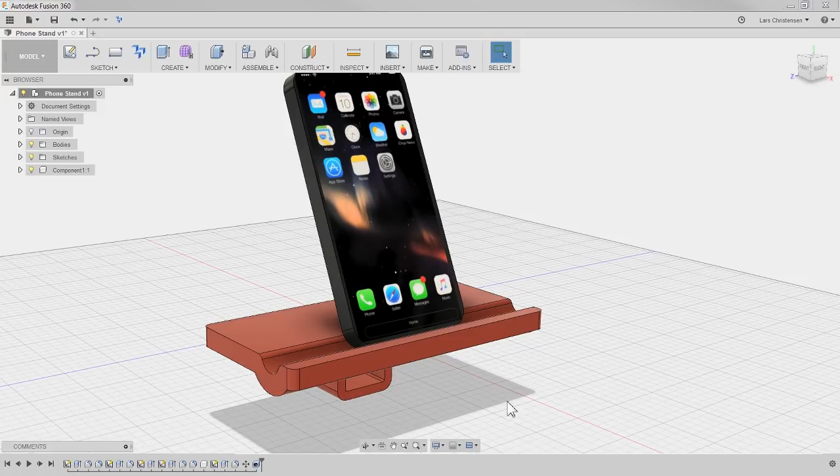So what we're going to do today is I thought it could be fun to model up a phone stand for your cellular phone. If you have a 3D printer this might be more fun. It's kind of like a phone stand - you'll see this is one I found a picture of online, I didn't come up with this. It has this square opening that would actually fit into, if you're doing it on an iPhone, the charging cube. So you can plug this into your outlet, and then slide this holder on top of it, and you now have a place where you can either place your phone up at an angle so you can watch the screen, or I've also seen people who just lay it down on the table and wrap their wire around it. Definitely not the most technical thing out there, but I think it's a really good exercise for modeling up if you're fairly new to Fusion. So that's what we're going to do today.

So enough of that - I can see here Randy asked that he would like to see some live tooling without a Y-axis in Fusion. Okay, that's good, but probably not what we're going to do here on the Facebook live streams - we could definitely chit-chat about it. That would be more for the YouTube style videos, I'd probably have to prep a little bit for that.

One other thing I wanted to address before we get into modeling this up in just two seconds - I got a question regarding the layout of Fusion that I thought was a really good question. You have these menus over here to the left, and then you have stuff down here at the bottom. Why are they split up like that? And if you're coming from other CAD software, I don't blame you for thinking, why are things split up this way?

By the way, hello to James, good to see you man.

So the way I like to look at this is that this left menu is kind of like your heads-up display or dashboard in your car, with information about the parts you're working on. The bottom down here is literally the history of the model being modeled up - that's all that's happening down here, each single step as you go through the modeling process. What happens over here is more like the dashboard on your car with different settings, starting at top telling you if this is just a single component or an assembly. In our case we see what looks like two or three squares stacked or next to each other, which tells us this is what we'd call an assembly, a multi-body. When we see that, we'll be looking for components. This iPhone-looking thing is a component, but there's only one component.

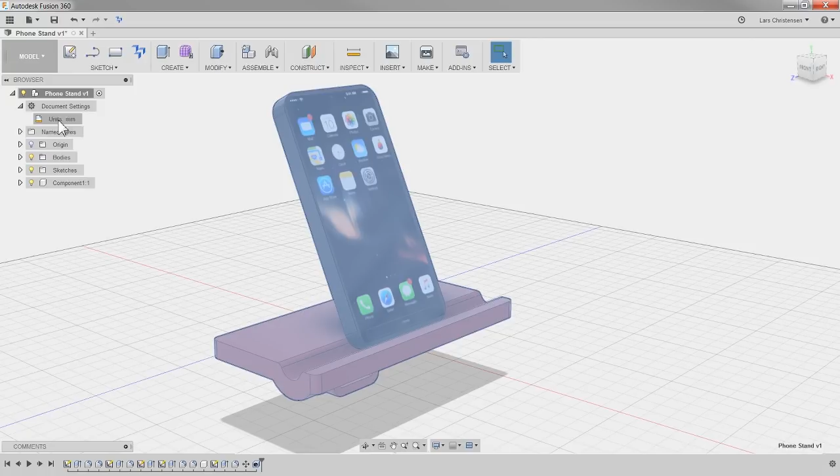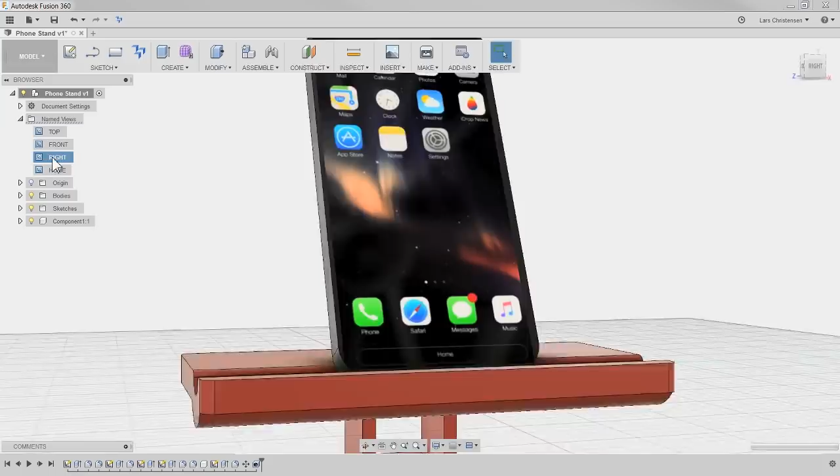So that's kind of like why I'm thinking this, to me, is a little bit like the dashboard on your car. Named views, I actually never really have gone in here in any of my live streams, but you will see that the views here are the ones assembled up here. So if I click top, we go into top view. Front, you can go to front view, and so forth. And home is the same as isometric.

Now, one thing you need to know, if I spin the model around like some obscure angle, you can actually right-click up here and create a new view. And that is now what's called a named view. What's great is if you're working on something and keep going back trying to find a specific view, you can create your named view.

So I can call it, Lars bottom. This is kind of like the bottom of the stand, or it could be the iPhone stand. So now, no matter what view I'm in, just move it around, whatever, and I click on this Lars bottom, and it takes me to that view.

You can right-click on them, and you can either update them or delete them. So that's kind of like how I look at this thing here, as kind of like a display. You've got your sketches, which will show you all the different sketches that were used. Now, all these sketches are also the same sketches you see down here. So if you count them, you should find the same amount of sketches down here as up here. And you can actually turn them on and off to display them by clicking on the little light bulb. Okay, so I hope that was a good explanation on that.

All right, I got my beer here. Cheers, everybody. We got WT, good to see you, thank you for stopping by. Minister from South Africa, awesome. Kurt says the iPhone a potato.

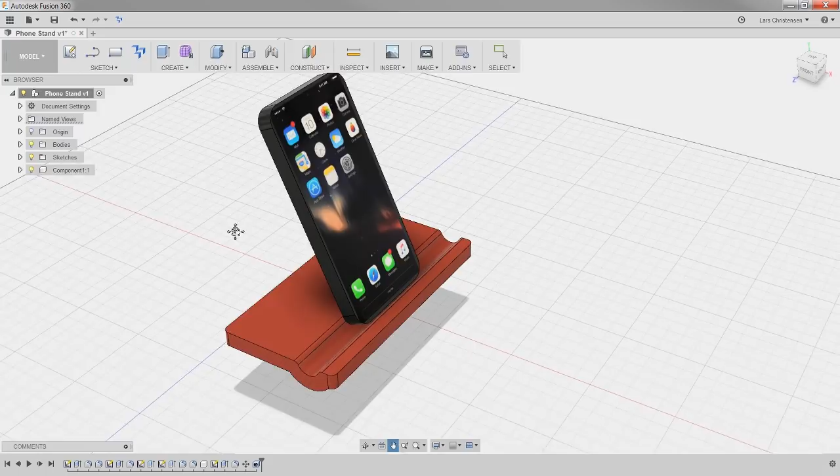So, with all this said, let's get rid of this part here and kind of like start from scratch, clear the slate, and work our way through it. So I'm going to start a new design. We can jump back and talk about this, but I'm going to new design, so blank canvas. A couple of things I like to do, and I have everything set to factory reset, so we're starting from scratch on these.

Two things that I like to change. First of all, I like to move down to the grid down here, and I like to turn it off, and I like to turn off snap to grid. The other thing I like to do is go over to this called the view cube, right-click on it, and change orthographic to perspective with ortho faces. That's the two things I do, okay?

So that is really what I normally will change from factory settings. Everything else I am running pretty much straight out of the box.

We got Darren here. Glad you made it, Darren. We haven't really gotten too far.

Okay, so let's start modeling up this phone stand here. First of all, we got this opening where, if you just came, Darren - this is a phone stand that you could 3D print if you have a 3D printer. That rectangle fits over whatever charger you have. I measured it up with an iPhone, or the potato. But that's kind of what that opening is for, so you can put the plug in, slide this one over, and you're good to go.

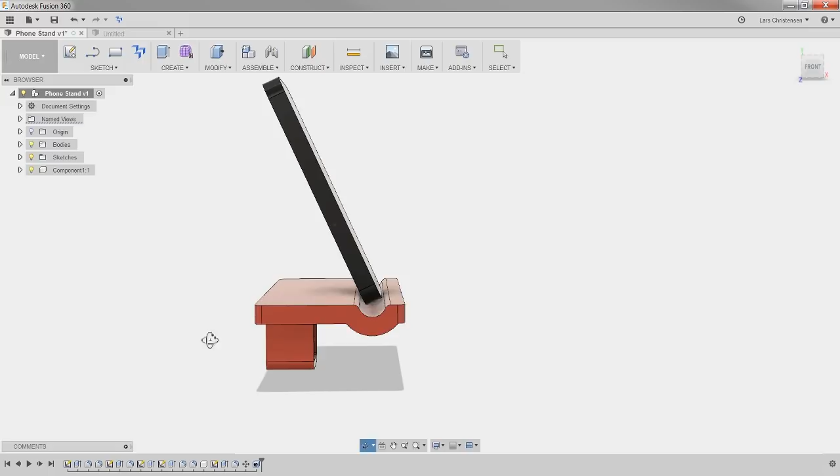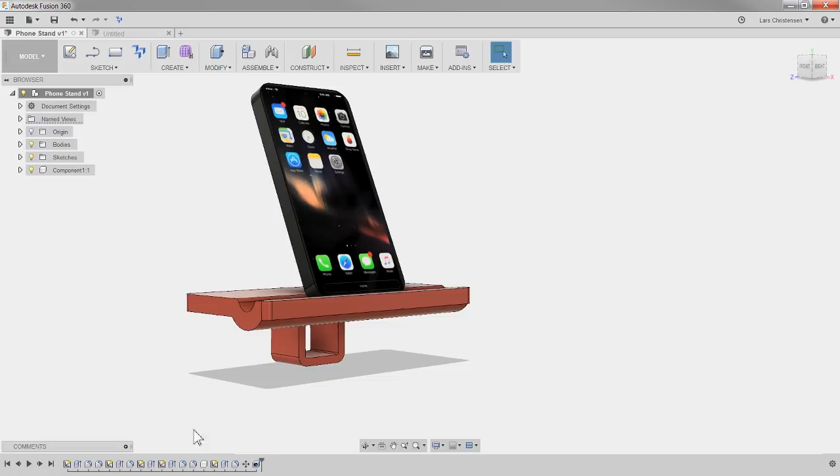Okay, so I'm going to start from scratch. When you start modeling things up, let's hide this iPhone for a second - I'm just going to turn it off. The way I'm moving my mouse around is I'm holding down Shift while I hold down the middle mouse button. That's how we're moving around like this. Scroll the middle mouse button and we zoom in and out.

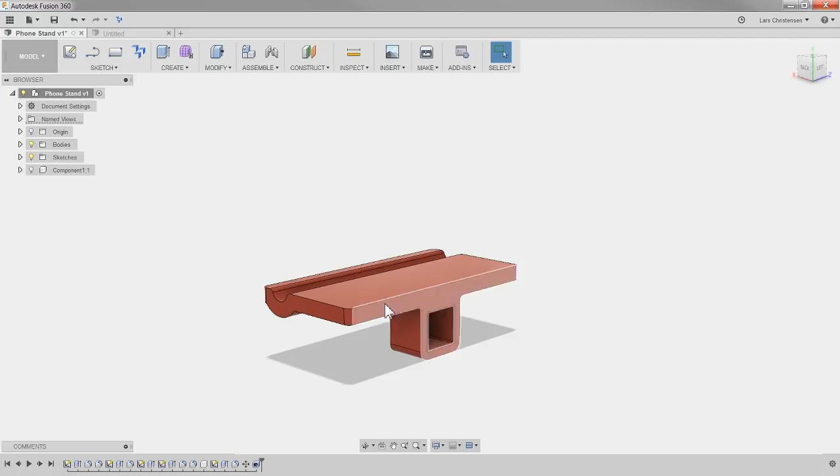So when you're starting out a new design, I think it's a good idea to think about what is the most important thing, because when we start our first sketch, where should we start on this part? I don't think there's one best way to do things - a lot of it has to do with how your brain works. But when I'm looking at this part, I'm thinking that the cube it's going to rest on, going into the wall, that's got to be the importance to start with. You definitely wouldn't start with the channel, right? Start with something that makes sense.

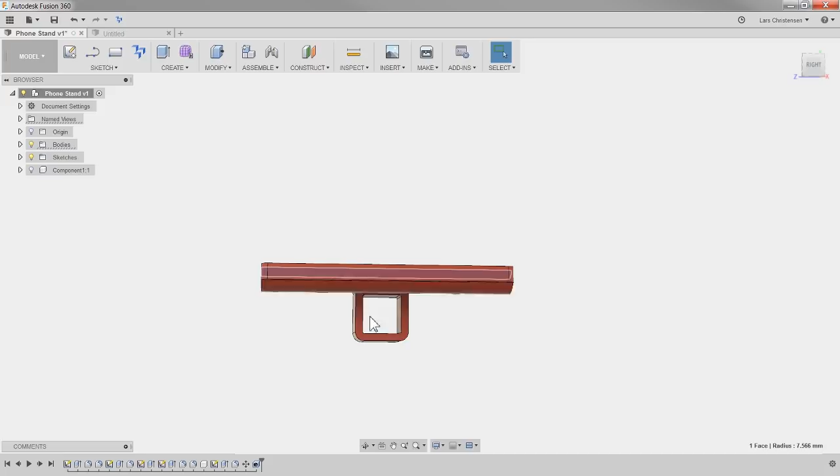Break it down - so we're going to start with this cube here. Go back to our new design, and always start on a face or a plane. But we don't have any faces because we don't have anything on the screen yet, so we can only start on a plane. So I'm going to start a new sketch, 2D sketch. And it doesn't really matter what plane you're selecting to start your first sketch on - there are no rules. Some people will say there are, but there are no rules.

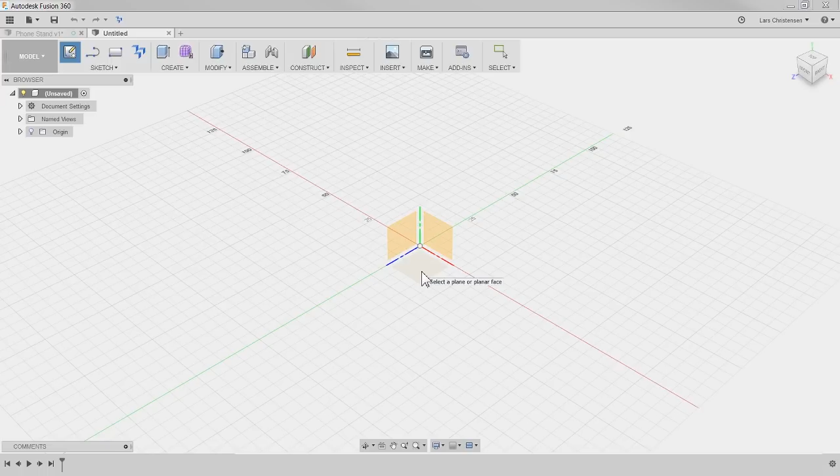So I'm going to pick this plane here, and it's going to go normal to it. We can see we're in the sketch dialog right here, over to the left. So where I'm facing right now compared to this iPhone stand is kind of like the front, looking at it front on here.

Now, I know I measured this cube because that's what it's kind of going to fit around, and we're going to do this in metric. It is 26 millimeters - it's actually not a perfect square, blame Apple for that, but I'm going to do it 26.

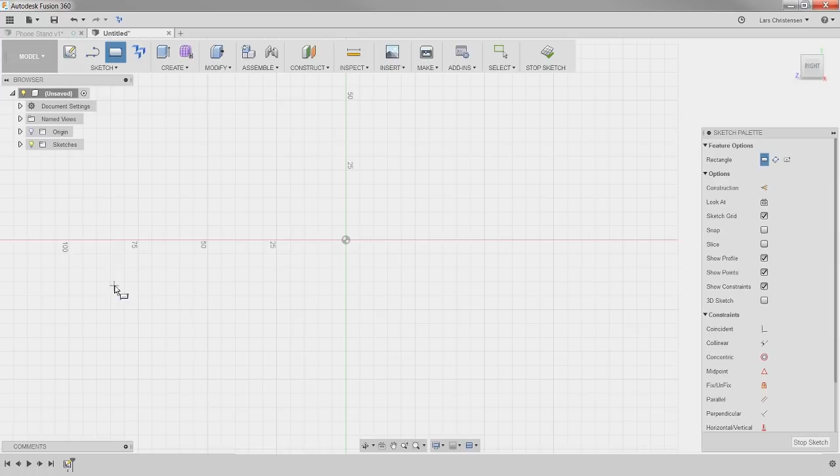So I'm going to go up and create a rectangle here, and I'd like to just start sketching out in space - just sketch a rectangle out, you can get it out there. Now you can see that you can put your dimensions in here - you can type in 26, hit tab, and it goes to the next dimension, 26, and hit enter. But if by mistake you just place it like this, we can get to the measuring tool by hitting D - D on the keyboard, D for dimension. So I'm going to make this one 26, hit enter, and hit 26 on this one and hit enter.

Okay, we now got that square opening here. Good to see you, Ben.

Thank you for joining. Now you'll see that though we put those two dimensions on, we have these horizontal and vertical constraints. If you're ever confused about what these are, look at them over here in the constraints - the symbols will resemble.

Now the reason it's still blue and not black is because if I get out of this, you'll see that this rectangle is still floating around. So we got to nail it down to space, and the way I like to nail it down is with constraints, right.

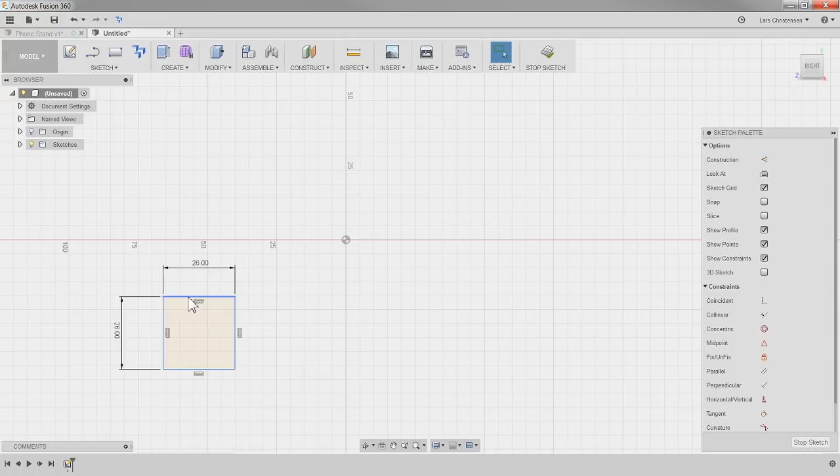So here's the origin, and this isn't the most important thing in the world I think, but we could decide to just have this square snap into a corner or something like that. But I really like the idea of having it right on the midpoint of the origin right there. So I'm going to go over and hit midpoint, click on the lines - that will snap the midpoint of the line to the origin right there. And as soon as I do that, you'll see that it snaps in and becomes black, and you'll see we get a little triangle there. So right now it's fully defined.

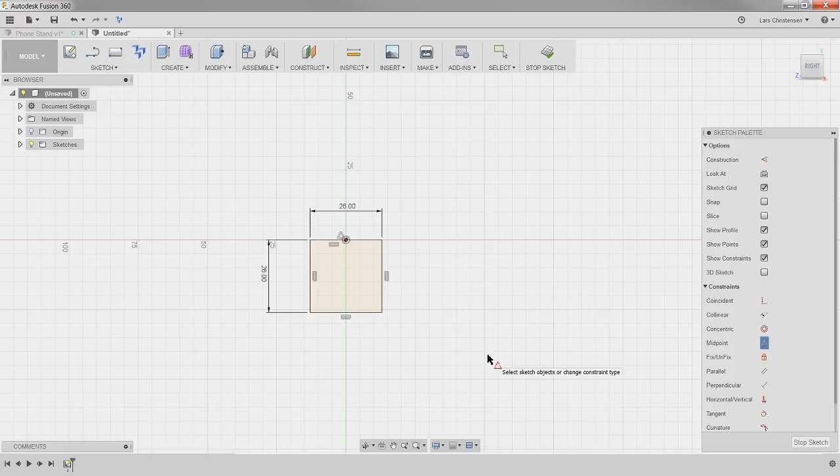Now it's ready to do something with it. Jay is asking why not type the dimensions when you're making the square rather than after. No, you're absolutely right, Jay, do that if you can. You can go in here and type 26, hit tab, 26, hit enter, and you'll be in the same place. I just showed it in case you're fairly new and have a tendency to left click, make your rectangle, left click again, and suddenly the dimensions are gone and you're like, what the heck. That was why I was showing that. Good eye, man, you're right on track.

So this is kind of like the shape of the cube. Now, I actually don't want the shape of the cube, I want that to be an opening, right? That's going to be a clearance on the cube, so I've got to create that wall on the outside. This is just pure design intent, but I think I'd like 5 millimeters on each side around this thing as my wall thickness.

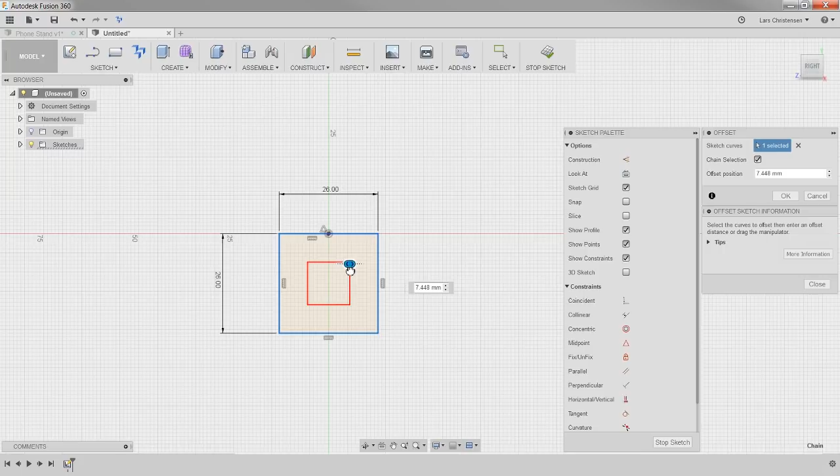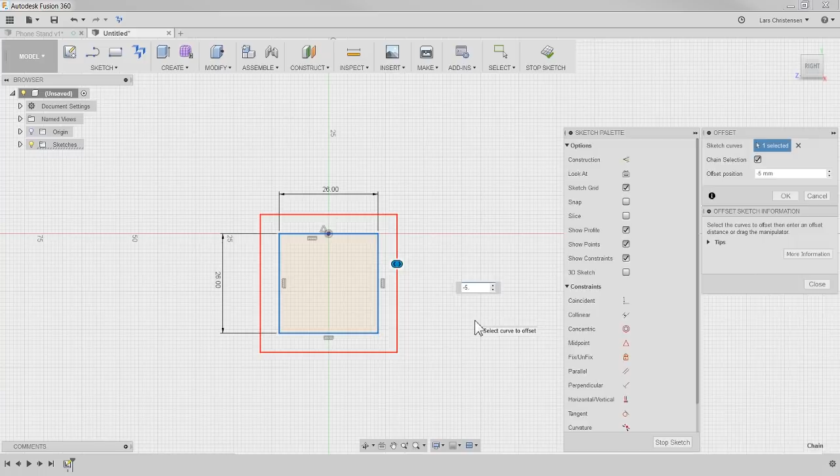So one thing I can do is hit O for offset. I like shortcut keys, and I think even if you're a new guy, why not start learning them from the get-go. Hit offset, and you'll see the chain selection is already checked, which means when I select this edge, it will offset the whole rectangle, chaining all the way around. Now you can choose to go either on the inside or on the outside. Look at these numbers, working with it - inside will be a plus value, outside will be a minus value, that's just how it defaults. I'm going to add 5 millimeters, type -5 to make sure it's on the outside, and hit enter. Now I've got an offset rectangle from the inside one.

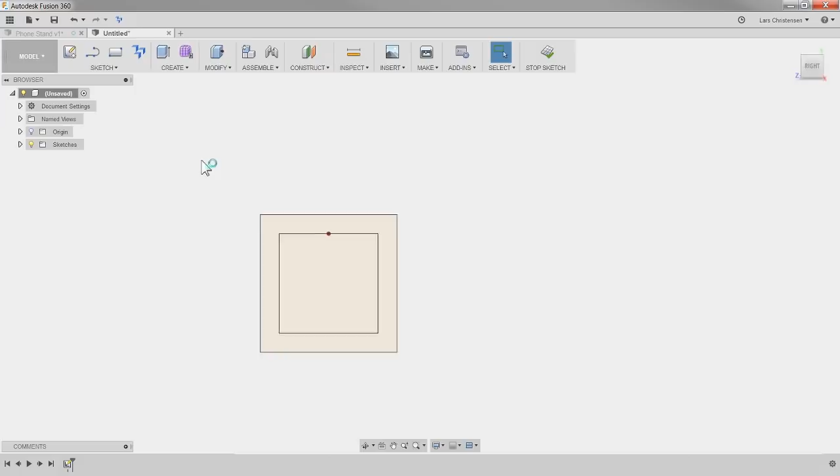Now let's go ahead and do an extrusion of this. Here is where I often hit Q for press pull. Just hiding the tips - you'll see it says press pull, and the question James had was, what's the difference between extrude and press pull? What I'm going to do when selecting, I could select the inside, the outside, or both. I'm just going to select the outside here. Now as soon as I do this, you'll see the menu changes from press pull to extrude.

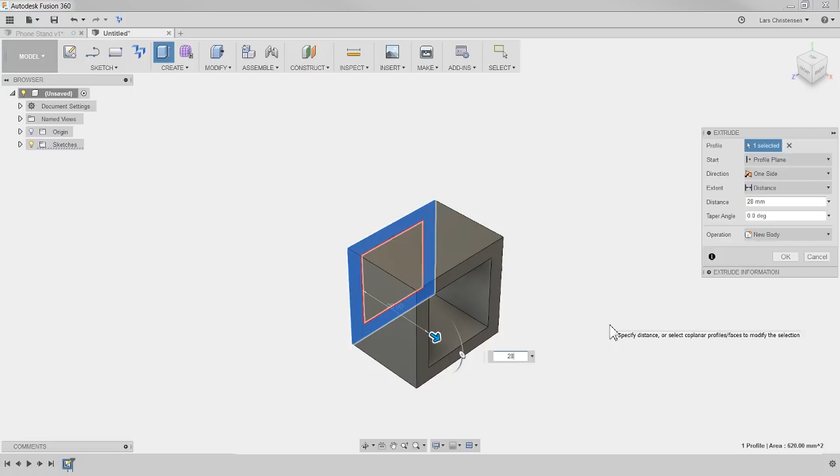The reason, James, I'll show you in a second, is that the press pull command is actually a bunch of different commands within one. So when we hit Q for press pull, if it's a command that can use extrude, it will jump into extrude. If I grab this little arrow here, I can start dragging out the 3D shape. So it is extrude, and again, I measured my cube length, and the cube length here is 28 millimeters, so I'll type that in, 28, and hit enter. There is our first solid body right here. Now hold down shift middle mouse button to rotate it around.

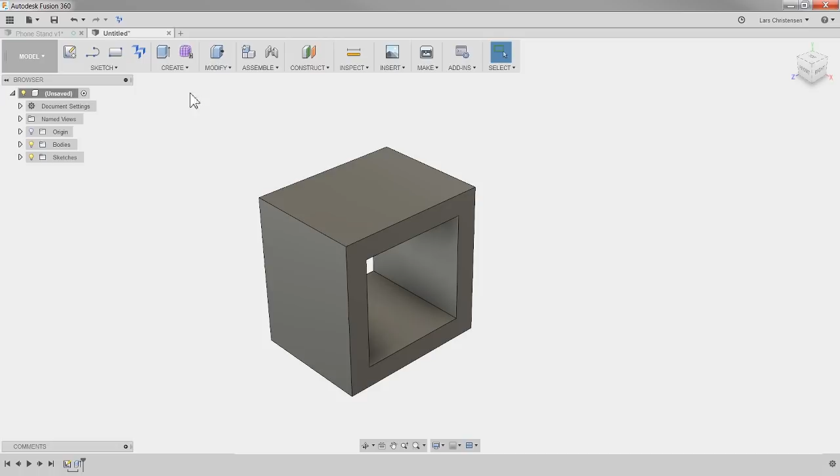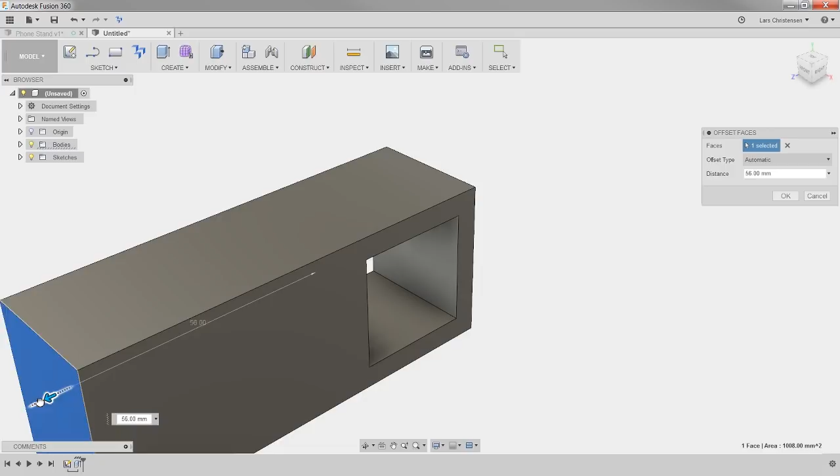Now, just to go back to press pull versus extrude - we have up here an extrude, and here the press pull command. The idea is press pull can do more than just extrude. If you're selecting a sketch, it will do an extrude, so Q and hit a sketch, it will do extrude. But if I select the face, you'll see that instead of going to extrude, it actually creates an offset face command, so now I can add to that thickness right there. Another thing press pull can do - if I hit Q and select an edge, it will turn it into a fillet. So I hope that explains it, James, that press pull will just do different things depending on what you select. That's why I never really use extrude, because press pull will do it if it's an extrude command.

So here is our first part here. Now you'll see that there are some fillets added to this part, and fillets are great for strength, smoothness, and things like that. To do the fillets, we can either go up here and hit the fillet command under modify, or as you can see right next to it, there's a letter - you can also just hit F on the keyboard.

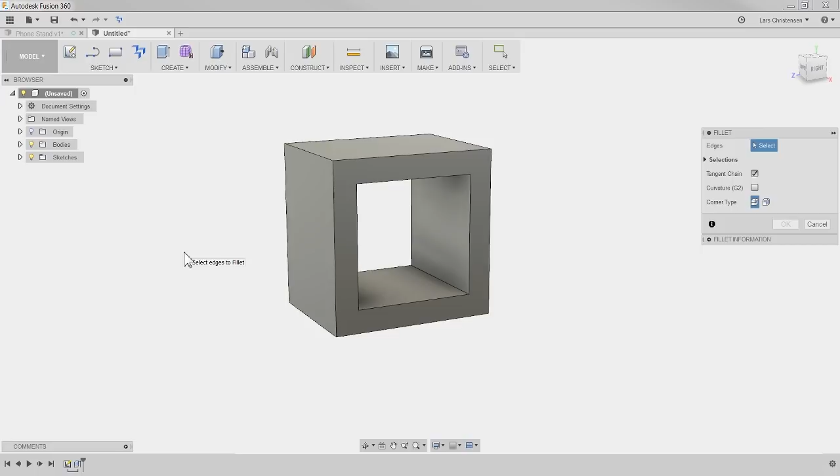And then we could start adding fillets in here. You don't actually have to rotate the model around - see here how I'm hovering over, you can select through the solids. Then we can drag it and add some fillets to this part here. Maybe 6 millimeters is good for this part.

Because, like I said before, it's a strength thing, I will also add a fillet to the inside. I'm not gonna do 6, because inside of this opening the cube needs to fit. You could get a radius gauge and figure out what these fillets are size-wise, but I'm not gonna bother doing that.

What I will do is add some small fillets, more just for strength. So let me hit F for fillets, or Q, same thing. I'll select through here so I don't have to rotate the part, and add a small fillet in here. If I do 1 millimeter, I think that will add enough strength and be good enough for clearances for the cube itself.

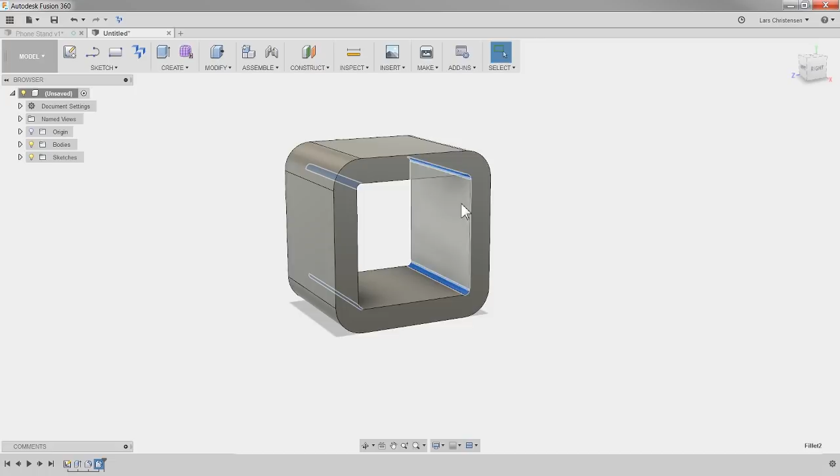So we added 1 millimeter fillets, see right down there, 3 there, on the inside, just to add a little bit of strength to the corner and make sure there was enough clearance for the cube. So yeah, David's question, when should you add it in the sketch? Because I could, if I click down here in the sketch and hit edit sketch, I could have gone in here and added the fillet right on the sketch level, applying 6 millimeters to all the corners.

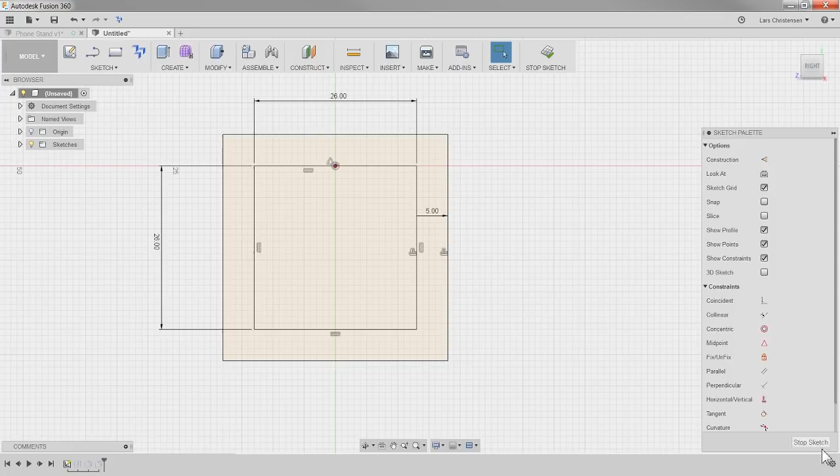You know what? There are no rules, okay? My practice, and you know, who am I to say, right? Sitting here drinking beer.

This is when I will do it: if you are sketching something up and you have to have a radius or fillet in there, and you know it will never be questioned if it has to change. I always joke around that I don't think I've ever modeled something where at some point the customer didn't come back and say, hey, we got to make some changes. But if I knew that radius is not going to change, and I don't want anybody who later gets my CAD model to work with it - could be the customer themselves - to have to dig down and play with it, then I will put it in the sketch level if I know it will not change.

But if I know there could be a chance - in this case here, we 3D print out this holder, and the customer holds it in their hand and says, I really wish these fillets were a little bit bigger - then I would for sure have them as a feature and not down in the sketch, because that would be easier. Standing right in front of the customer, you could go in and make the changes right there.

I actually have in the past also used the parameters for things like that. So in here in the parameters, you can create one that is called fillets, and then you could just change it right on the go with the customer looking at you. So that's really my kind of rule for that.

Theomir, I'm not quite sure how to pronounce your name, I'm sorry buddy. 2:25 a.m. - what the heck are you doing at this hour watching me?

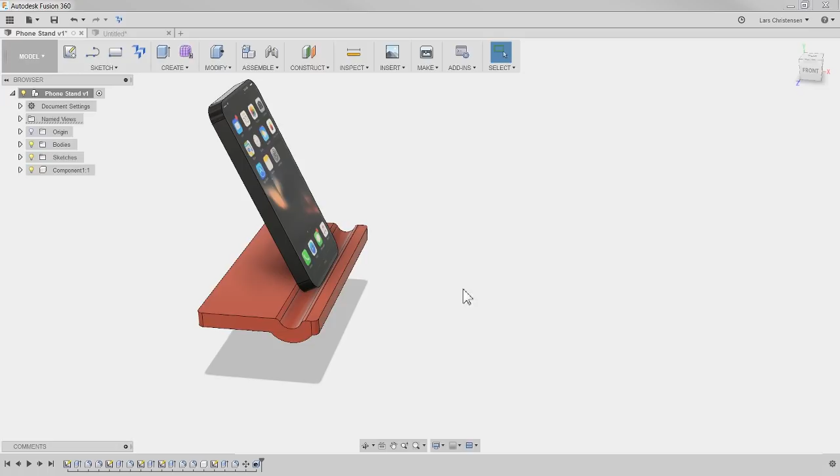Okay, so I created this cube here. I'll leave that as is, and now I want to pay attention to the top shelf area. The top shelf does two things if you just entered: one, you can have your phone leaning up against the wall right here, or you could just lay it flat to rest. You come home, throw it in there for charging, and lay it flat.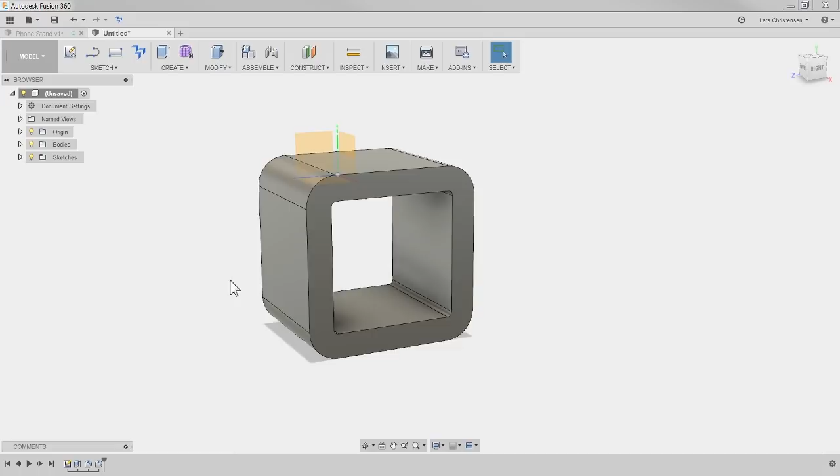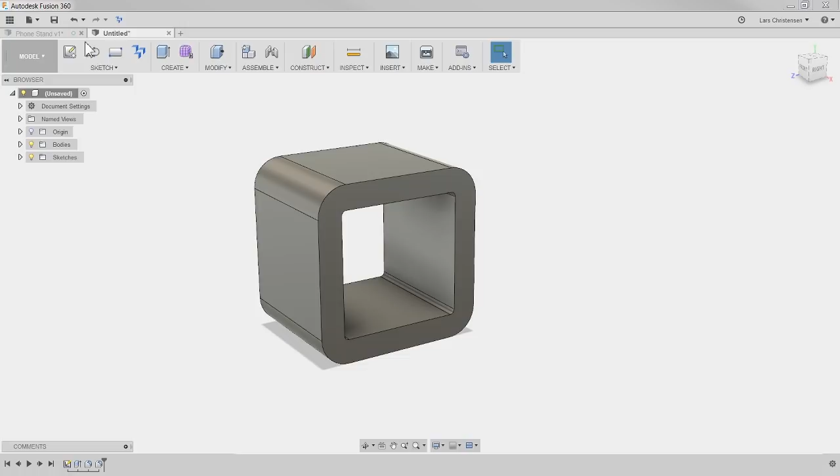So we're going to concentrate on that. Now, on our model, let me go back to the origin. We placed the origin in here, and I'm perfectly happy with that placement. Now when I create the flat area, I'm going to sketch on this face. Before, we didn't have any faces to draw on, so we drew on a plane, but now I'll select this face. I'll go over here, create a new sketch, and select that top face.

I'm just going to zoom out, scrolling the middle mouse button, and do another rectangle right here. There you go, that's better. I'm just going to place another rectangle here, and many times I'll just sketch something out in space.

Now, to Jay's comment before, we have the dimensions here and can type them right in, so we can do that right here. Now, how big should this table be? That's an absolute preference. I'm not going to type them in right now because I have to get over to my webcam, sorry about that. That's, of course, a preference - how big do you want to make that table?

What I did was I measured my phone, and I decided I want it to be about 10 millimeters long on each end. I don't really want it to hang over. I'm thinking that if you're throwing it down flat on that shelf, it's probably going to lay somewhat against the wall, so I'm just going to add another 10 millimeters on the outside. That's kind of what I was thinking.

So now where I placed it, I have to do the dimensions. In this CAD software, D is for dimension - whoops, get out of the rectangle here. D for dimension is 140 millimeters long, so I'm typing 140. You can actually do math in here - I want to add 10 millimeters on each side, so plus 20. You can type math right in there.

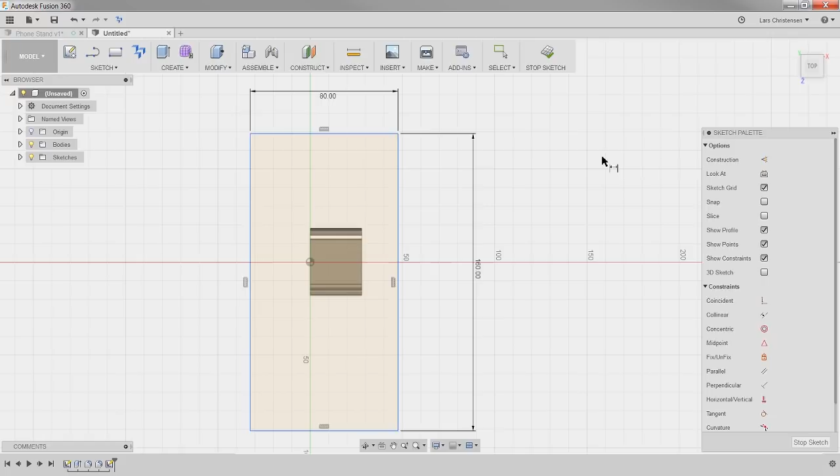And the width of an iPhone is 70, and like I said, I wanted to add another 10 millimeters on the other side, so I'll make it - I'll do that in my head - 80. There you go. Okay, now again, just like before, this rectangle floats around.

So I'm going to do the same thing I did before: select my midpoint constraint, select this line, and attach it to the origin right there, and that's been laid in just like this.

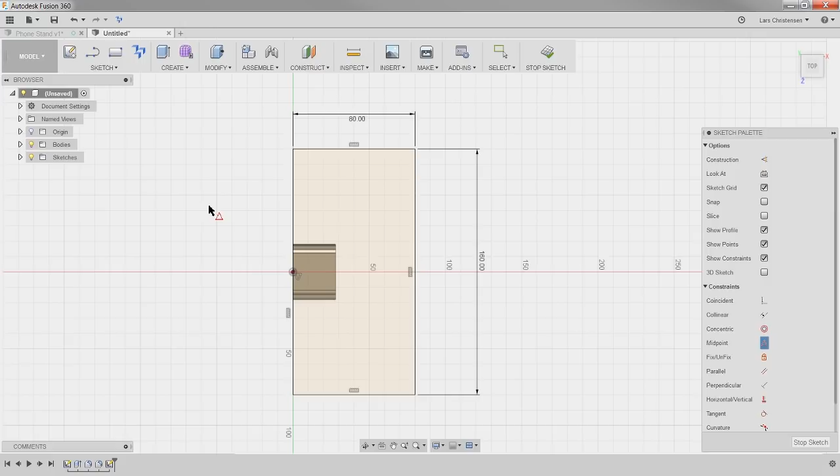Okay, now from this point we can go ahead and extrude or press pull. We don't even have to get out of the sketch - if I hit Q right now, like this, then we can hit press pull. Notice that when I select the area, the software is smart enough to know where the intersection lines are, so if I just select here, it doesn't select over on top.

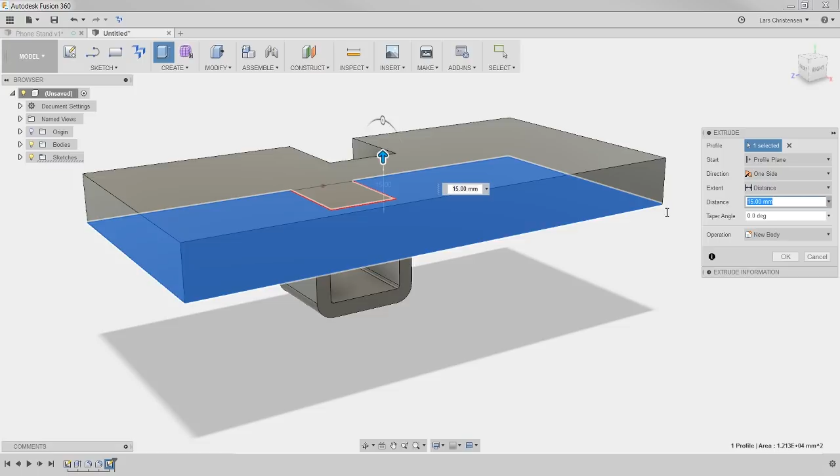Which means if I just start dragging up here, you'll see we get an opening over here. So be aware whenever you're selecting - make sure you select both areas here - and we can move it up. I'm going to keep the consistency of 10 millimeters, though you might want to make this a little bit thinner. And I'll hit OK to that.

Now, I did this on purpose before just to show you - I'm going to hold down Shift and drag my mouse around. See, when I did this, the software will actually merge the two surfaces, but these fillets here are really not great at this area. This happens to me many times.

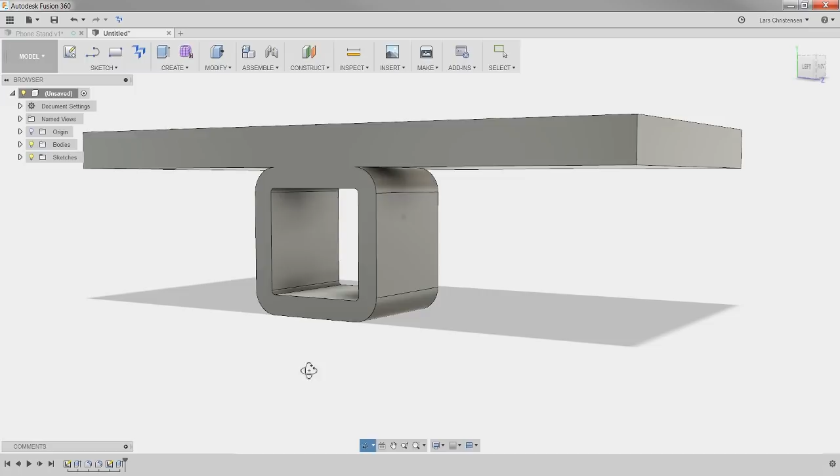I'm kind of like thinking piece by piece, and now I'm coming to realize that these fillets in here are really not what I want. What I want is more like what you see on this one here, where I have a fillet on the outside.

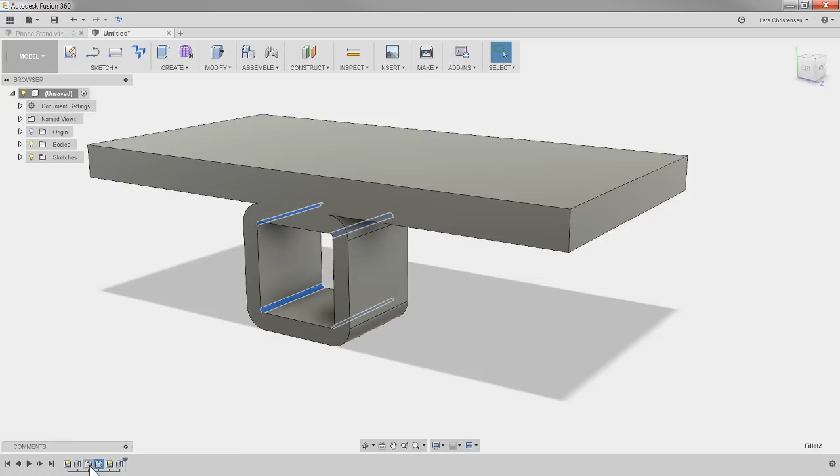So the fillet is kind of like adding strength, where this is adding a breaking point right here. One important thing to know is we can go back to this history tree down here. We can find that fillet, right click and hit edit. Now, when you do that, you're actually suppressing whatever happened after. You'll see the top went away.

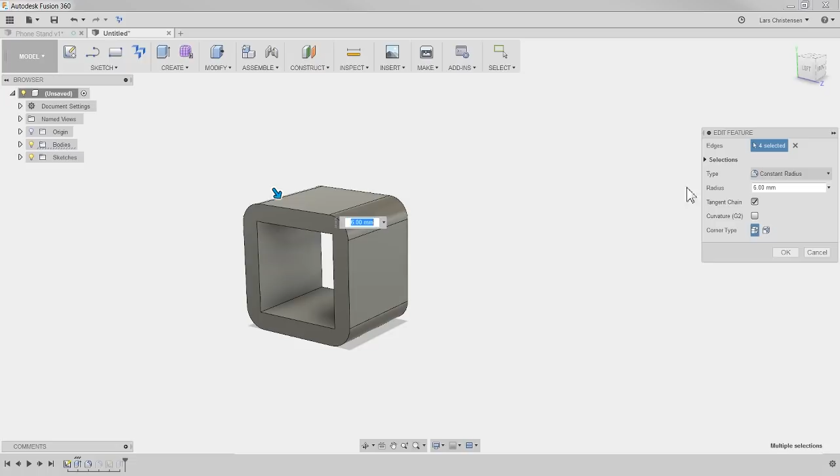Now I wish I could just unselect the two, I already did, but I can't. So I'm just going to hit X to unselect and just select these two bottom edges here to make those 6 like that. And when I hit enter, you'll see we're back here, and now we've eliminated those top ones.

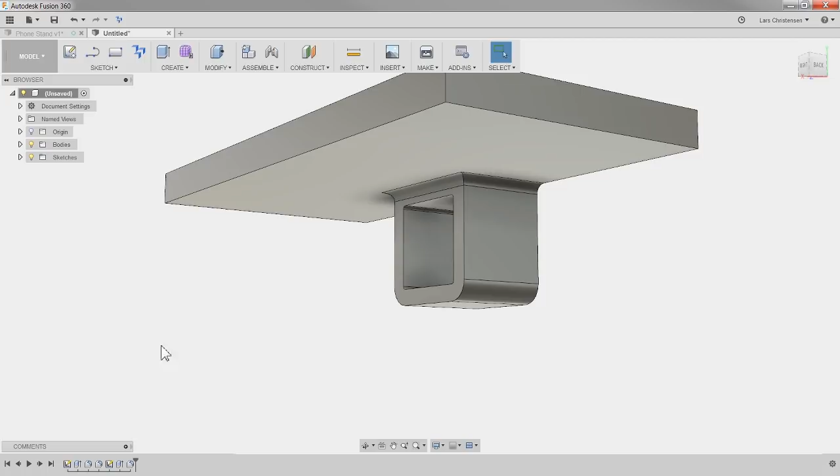And then I'm going to add another fillet. I can now select, and I decided to just select 3 edges. So select this edge, spin around, hold down Shift middle mouse button, and select this one. And then we can find out, I don't know how big I made it. Maybe 3. Looks pretty good there. Okay, so we're almost there. That looks pretty good.

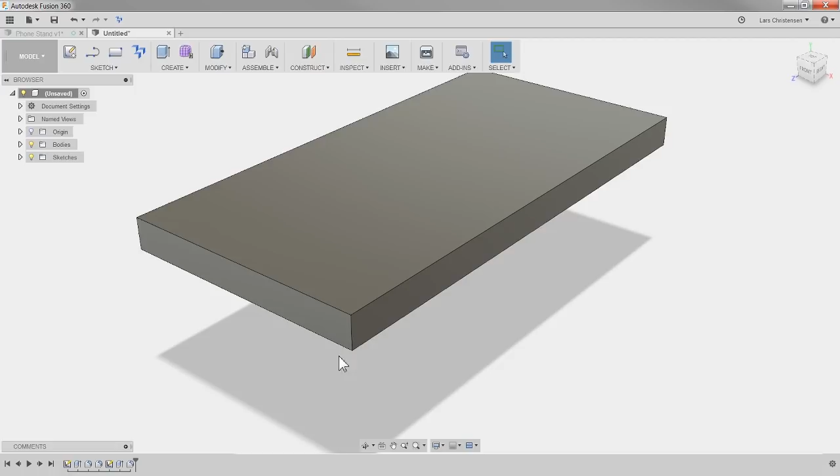David is talking about being better with a slice and push pull. I'm not quite sure what you're referring to, David. Might need a little bit more explanation on that.

Okay, so this is done, and right now we're probably halfway there compared to the original one we're going for. At least we have a place we can put our phone down on this little charger here.

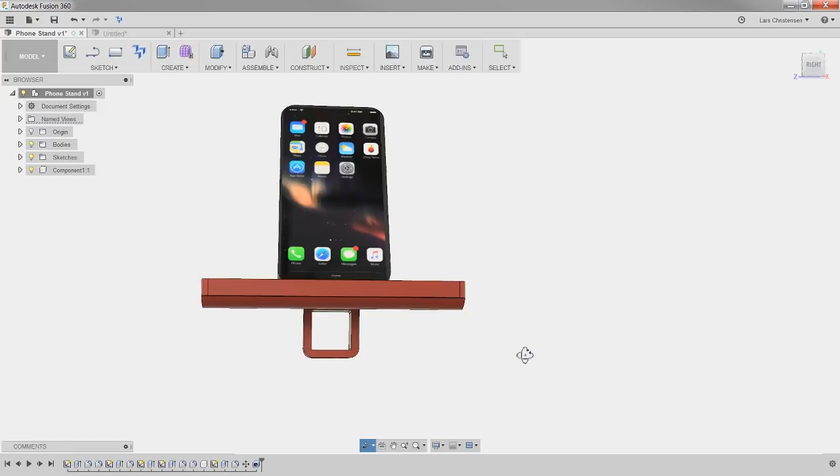If you just joined, you can see David just joined. This is a charger where you can put your little cube in here for your charger. Let me see if I can call up that picture again. So you can plug in your phone, and you have like a little cute charger here. That's what we are kind of like working on in this session. So I hope that is useful to you, David.

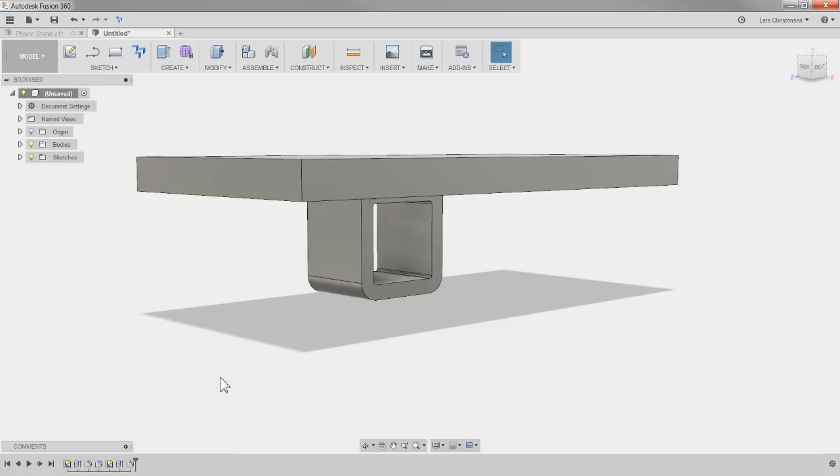So the next thing I want to work on is this curve area here. I kind of have the slot to fit within. Again, this is really just preference, but what I decided was that I wanted kind of an arc, and now we got to find a place to sketch that arc.

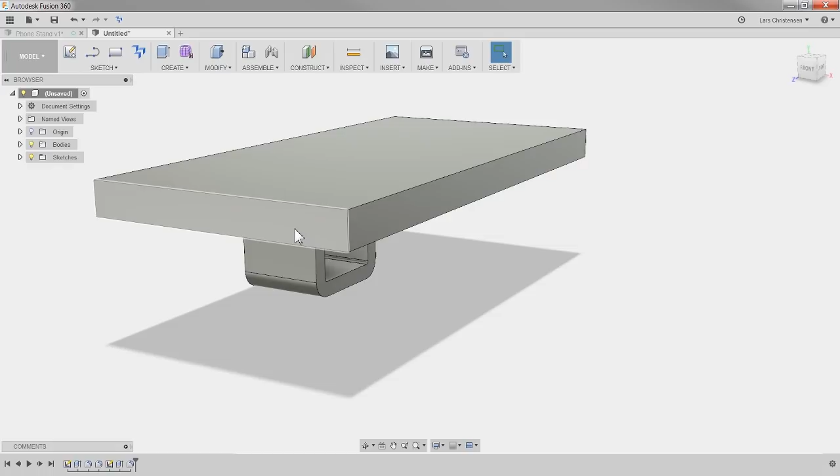So I'm going to select this face. When we started out before, the first sketch we used was on a plane. The next one we did to create the shelf area was on a face, and now I'm selecting another face to create that arc for the phone to rest in.

Hey Anthony, thank you for joining. So to do that, I'm going to open another sketch, kind of repeating what you've already seen me do. And click on here, and I'm going to click on the side face right here.

Just like we can do the rectangles up here, we have different types of tools if you hit the drop down. I always recommend people, I know when we're trying to model we always want to get something on the screen quick. But if you have a little bit of time, it's a good idea to go in here and just spend 30 seconds looking at some of the different things in here. Maybe try to play with them.

My favorite arc is the 3-point arc. It didn't used to be like that, to be honest. But as soon as you know what are the 3 points you select, in what order, then you're all good. So I'm going to click on 3-point arc.

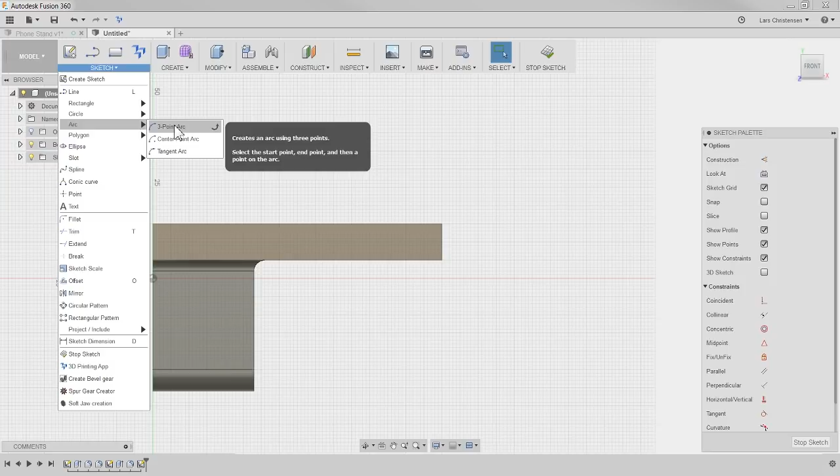And the way the 3-point arc works is you're selecting the 2 endpoints, and then you're selecting the 3rd point. So I'm just going to make sure it snaps to this top end here, left click once, select my 2nd endpoint, left click twice, and then you'll see that this arc appears. I'm just going to place the last one down somewhere around here, doesn't really matter.

Now, you'll see my cursor still has the arc tool next to it. I'm going to hit escape on my keyboard to get out of that. Of course, it's all blue, so we can move it around. Now we kind of gotta define it with the right dimensions here. All right, we can see we got a couple of questions, or comments at least.

So Bob says you could have made the shelf with the first sketch if you extruded 2 different bodies. Is this a good idea, having more than one body created from a single sketch? That's a great question, Bob.

You know what, no, I think that you are absolutely cool. If you know, why should you have multiple sketches if you can pack everything into one sketch? Why not? The only reason I'd say not to do that is your sketches could, not with this part, but your sketches could get very complex if you cram everything into just one sketch. But it's not bad practice. Now if you're starting out and you're brand new, but again, these live streams on Facebook at night, that's what I'm intending this for.

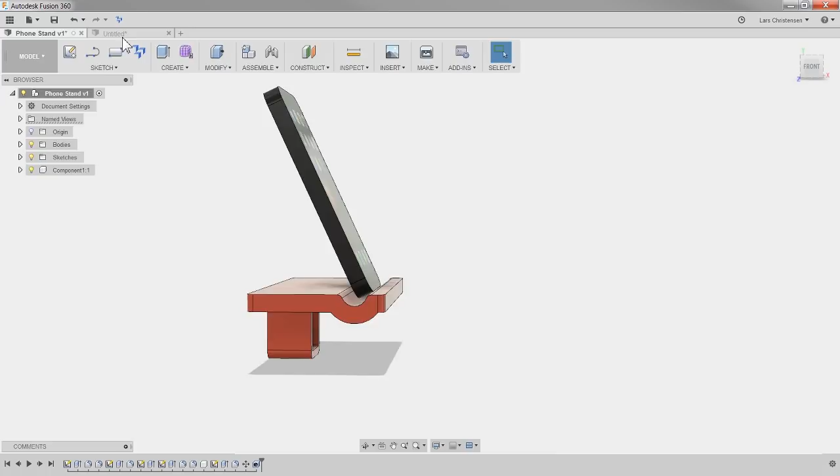Belen, why an arc could also be a circle, and you cut the whole cylinder all the way through, right? Yeah, so you could have drawn, you're right. This didn't, I'm only gonna cut that half shape right there and add a couple of fillets to it. An arc, that's an arc, right? But yes, you could absolutely have hit C for circle and sketch that out there. Absolutely, yep, nothing wrong with that. I don't think there was anything that I could tell you that would be bad with that.

All right, so Curtis is making a comment, I think, to David. I might have just missed that one. I'm sorry.

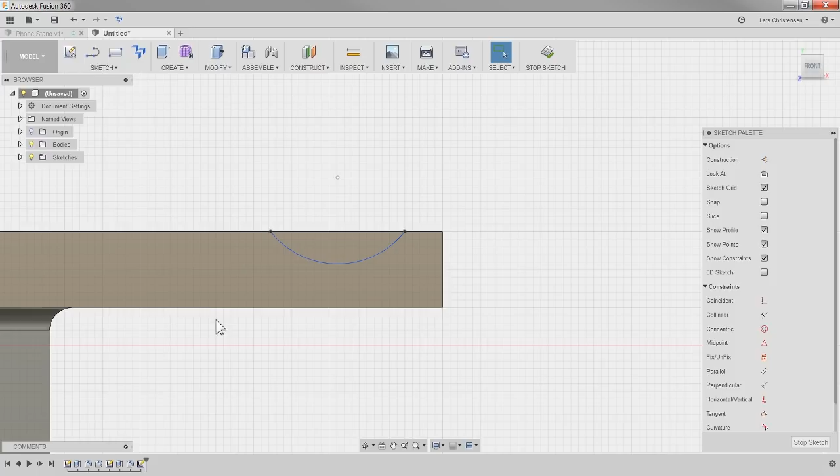All right, so one question Bob has, I'm sorry Curtis, I think you got it. Bob says, if you rotate your sketch, how do you get back to looking at it straight forward?

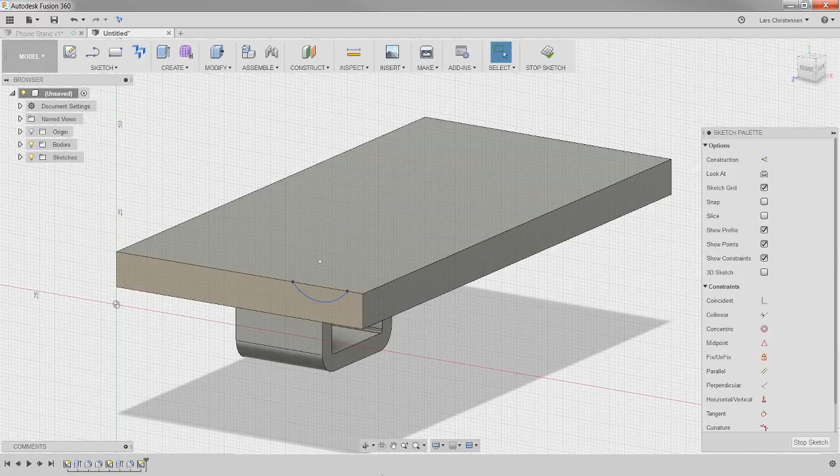Normally when I'm working, honestly, I just hit up here on the view cube. That's kind of like my default. But trust me, I don't always do all the right things. If you ever follow me on my YouTube live streams, you'll know that. One thing you can do down here, there is a button called Look At. So if I click on Look At, and I click on that face where that sketch is, then it will go normal to it. But it is actually also a setting in your preferences, I believe.

I think there's a setting in here, now I might just dig deep. Auto look at a sketch. So this one here means that when you're starting a sketch, you click on a face, it will go and look right straight at that. So you can turn that off if you don't want it.

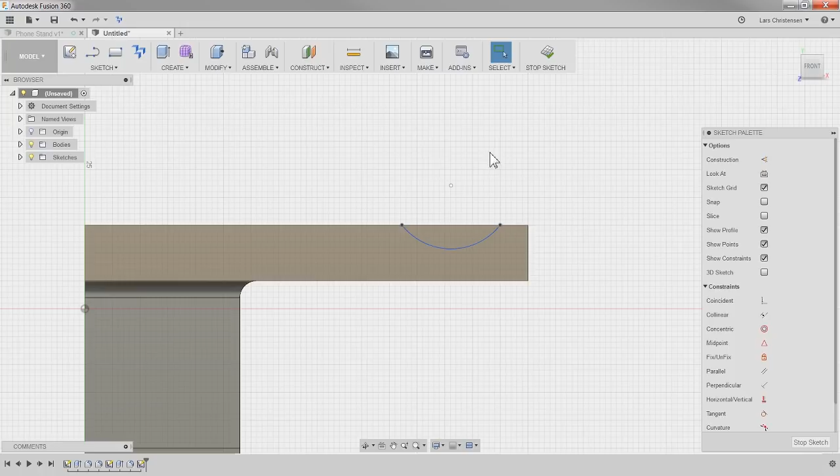Okay, we're gonna place some dimensions on this. Again, this is kind of just in my head. I hit D for dimension. I decided that I wanted this one here to be 15 wide, just because that looks pretty good to me. And I wanted it, again, 10 millimeters from the edge. Not for any specific reason, just I thought I'd stick with the 10. We have 10 thickness.

And then I'm gonna decide that I want to control how deep that slot is by making a dimension from the center of that circle, that arc, sorry, to the edge. And I figured out that 1 looked like a pretty good groove. We see everything here is all black, and we're all good.

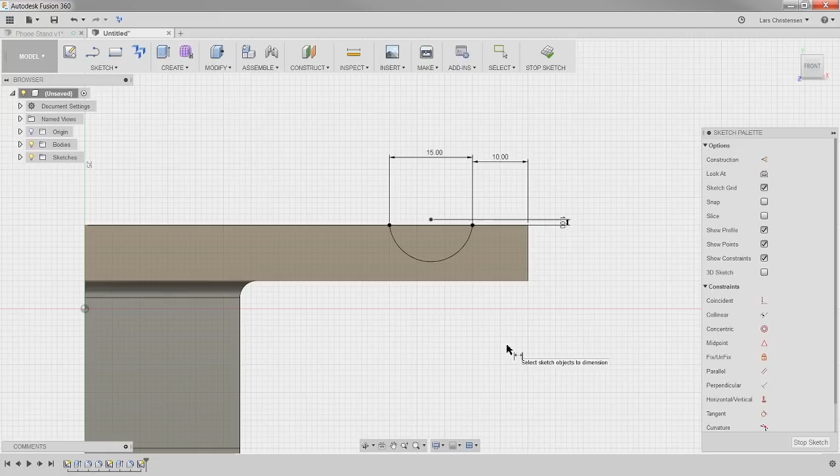Now I'm gonna do what I did before, Q for press pull. Wow, I only had a half a beer and I'm already questioning myself. And selecting this half moon shape here. Now if I pull straight out, it's going to be an extrude out. If we go in, it's going to be that cut I want.

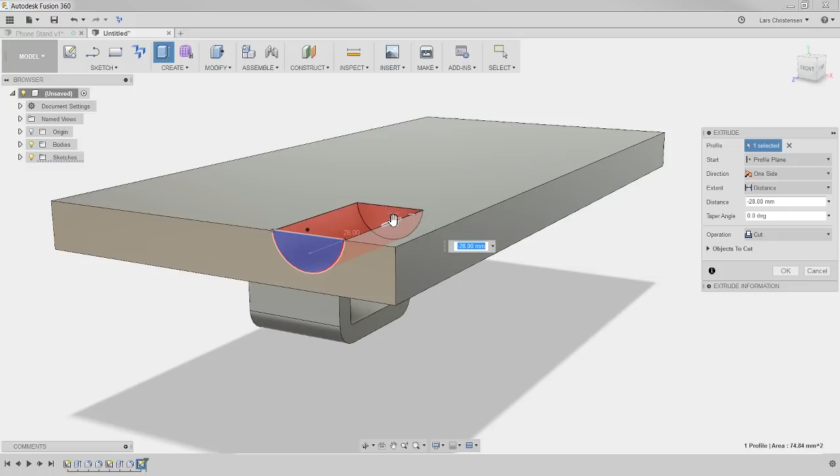I prefer, so you could just drag it out, like I think many people just do that. Just drag the arrow out like this, and then hit OK. I prefer to go down here and click all, so it's going to go through any bodies that it sees, which kind of trims it to here.

The reason for that is that if we do a distance and we just decide, like many people do, to drag the arrow out, something like that, so now it's hanging out here with a distance, and we hit OK, we still get what we want.

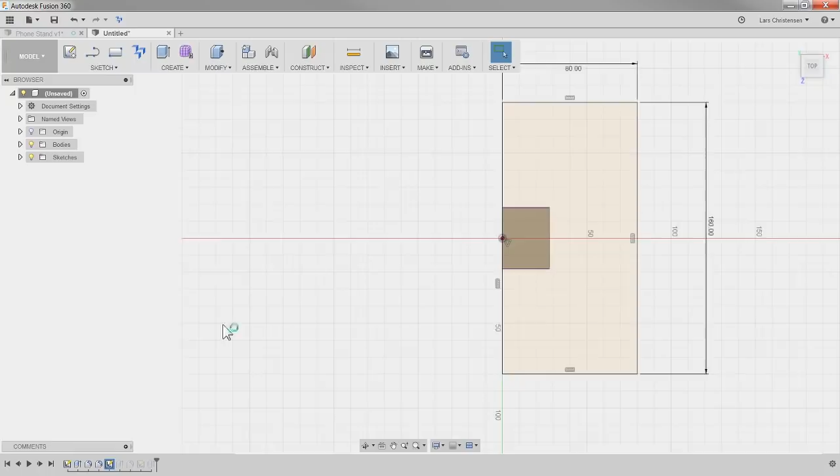But if at some point we were talking to the customer and they decided they were going to do it for one of those cool Samsung phones that are a lot bigger, we go back in and edit that original sketch, right click and hit edit, and we decided we were going to make this one - right now it's 160, but what if we wanted to make it really big? 220, right? Exit out of the sketch.

Now you will see that that cut would not go all the way through, and now you would have to go back in again, hit edit, and then drag the arrow out more. If you do all, then it's just going to do whatever this one is, right? So now it doesn't really matter if it gets longer or shorter. That cut will always go all the way through.

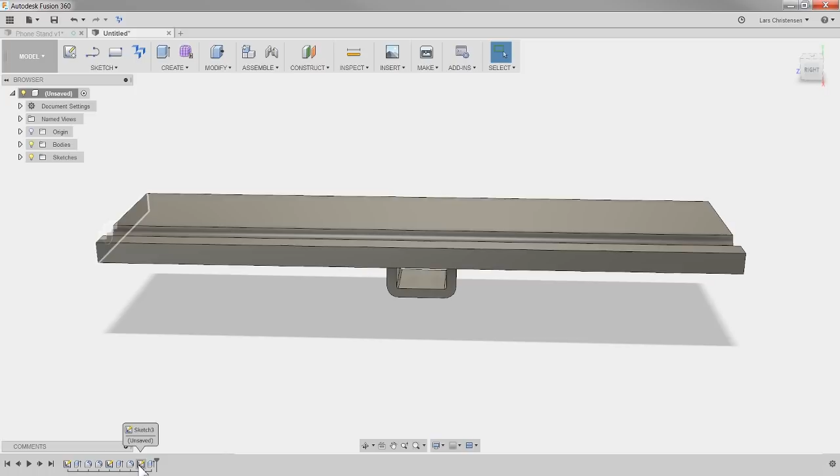So that's why I do that, in case you were wondering. Okay, so we did 160, right? Okay, we're almost done here, guys.

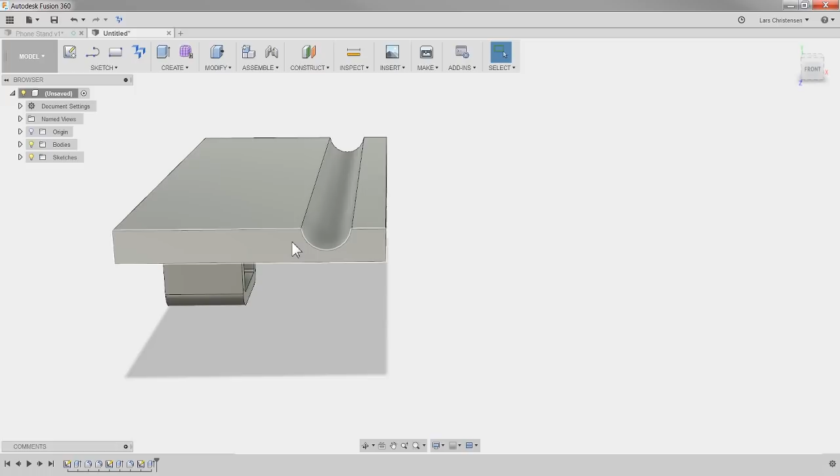Now, I did this, and one of the things that's great about being a designer in a CAD software is that you can look at things and be like, I really don't like how the thickness right here looks - I don't like how we suddenly are losing a lot of thickness right here. I would like to have that same kind of strength on here. So what we could do is create another feature.

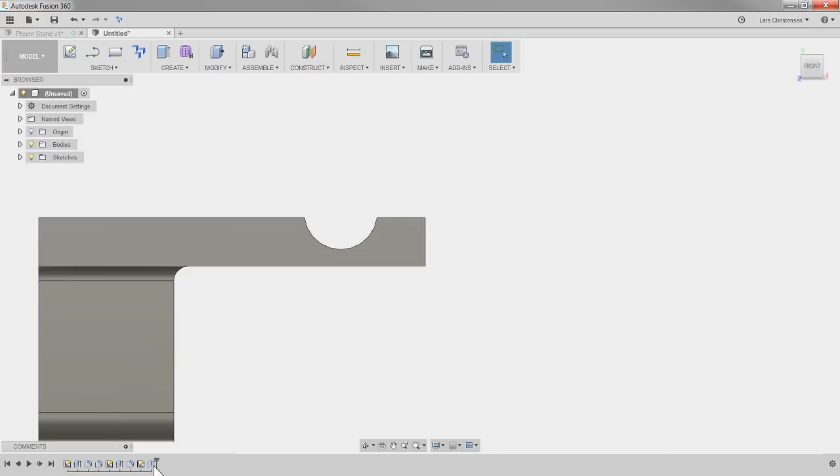So down here we have all these different features, right? So I'm going to right click on that face, create a new sketch, right? And then we could use the tool we've already used once, offset, O for offset. Select this. Now, here's an interesting thing - I talked about before that we had chain selection on. Now, if I select this, it's going to chain select the whole thing.

In this case, that was what I wanted the first time. Now I don't want it. So I'm going to uncheck chain selection, and then it will only select that edge I'm selecting. And I can now offset this edge out here. Now, I wanted to keep it the same thickness as we had over here, so that would be 10. So I'm just going to type that out here.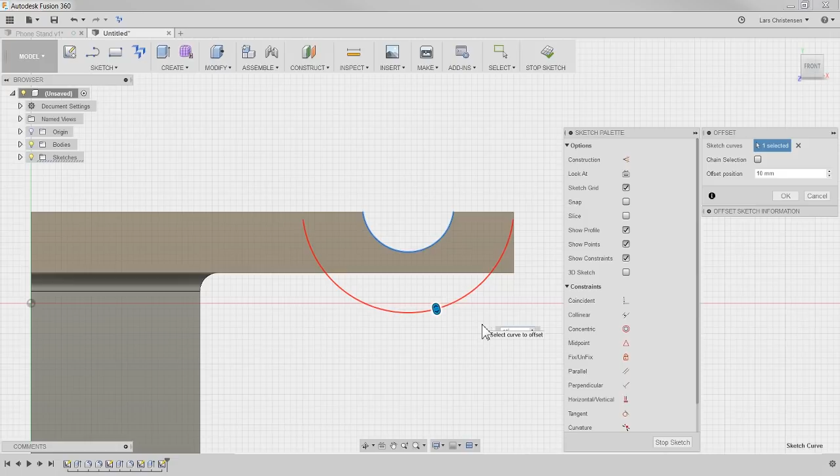Hit enter, and notice how the color in here is different than it is out here. That means this is actually ready to be extruded. So I can literally hit Q again. Now notice how it didn't rotate this time - sometimes it does not rotate.

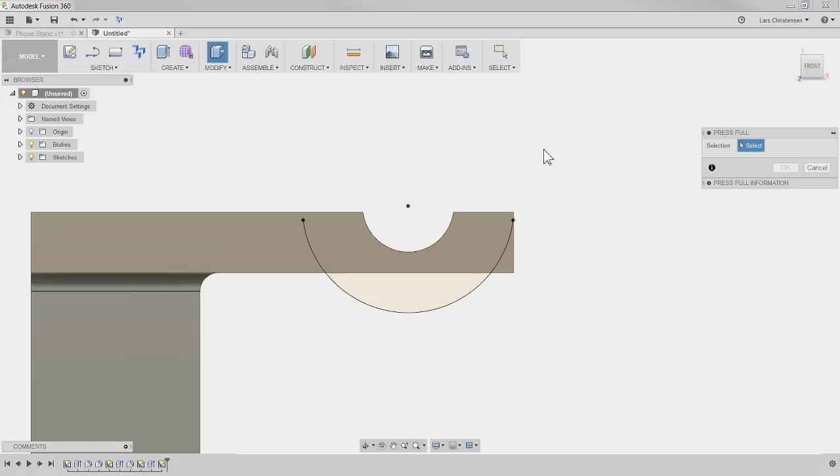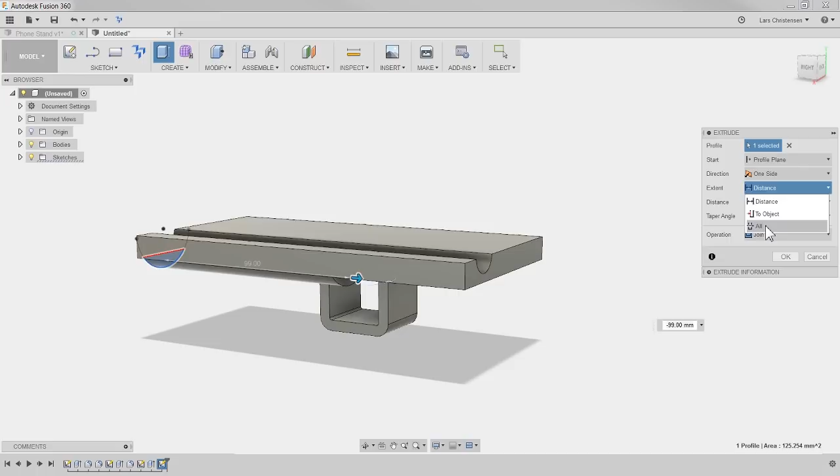I'm going to hold down Shift, middle mouse button, and select that bottom edge, and drag that out to give it that thickness going up right here. Now, I was talking before that I like to do through all, but since we're adding, we can actually not do through all - it doesn't really work that way. But we can do to object, and if we now select in this face, we're kind of doing the same kind of thing.

And then you have these chain faces down here. They can be a little bit tricky which one you should select. Okay, hit that, and now we've kind of assured that we've gotten that same thickness going down here for the groove. The last thing I'm really only going to do to this part is add some fillets, just to make sure we don't cut ourselves and make it look a little smooth.

Probably break it down - like if you're looking at my original one here, you'll see that I kind of broke it down into some different steps, some different sizes.

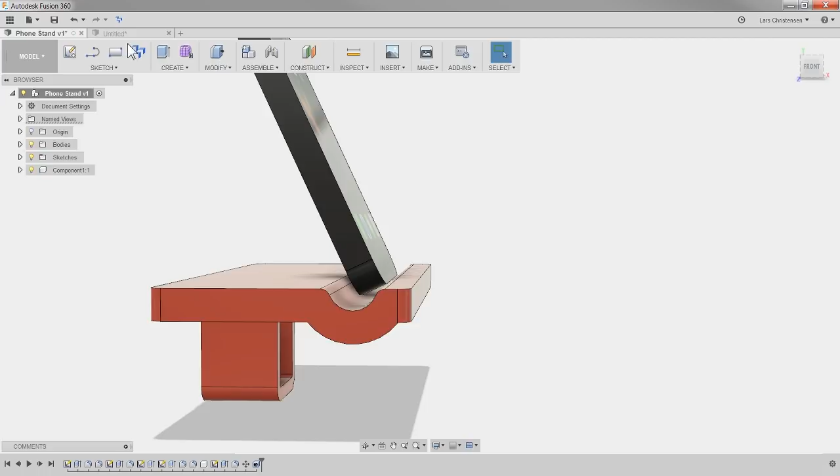Let's hit F for fillet and place one on the inside here. I can't remember how big I made them - you could always change those. I'll round them up to 3 there.

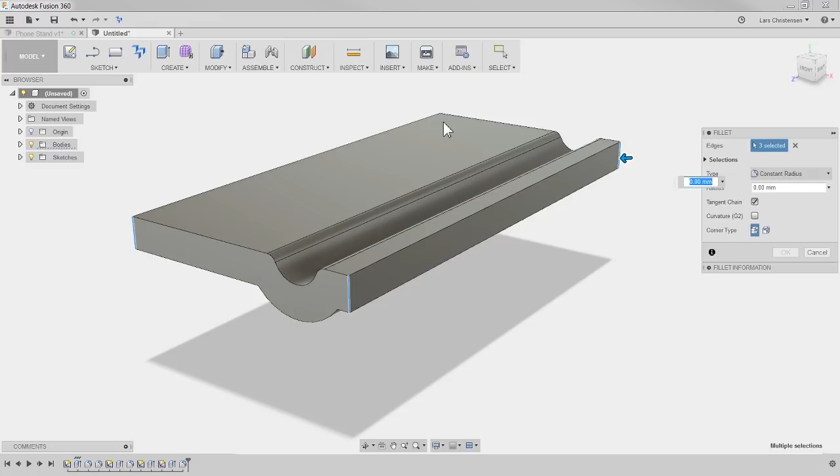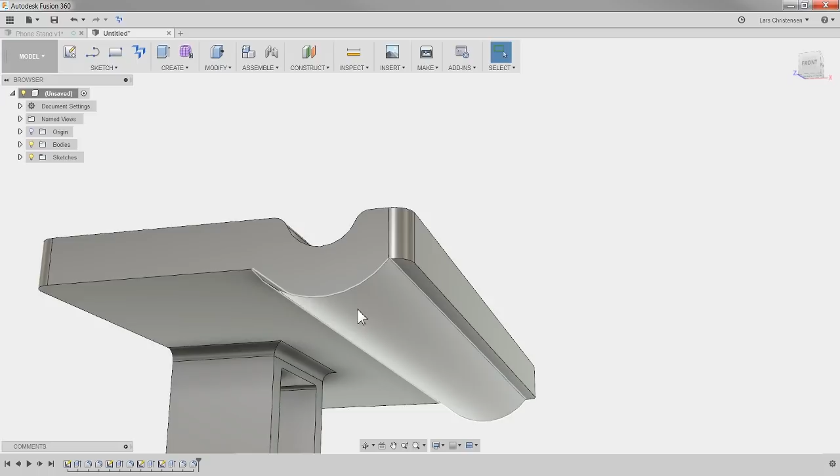And then I probably also hit another fillet, and made sure I had a nice fillet to the outside rounds here, right? You can kind of use the handle and just drag it in - that gives me a little bit of a view of about how big I want to make them. Let's make it 4. Okay, so now we got that there. You could also maybe add a small fillet on the inside here if you wanted to.

The last thing I'm going to do to this one, David, is we don't want any blood, nobody can cut themselves on this. I don't know if I'd normally do this, but adding a little chamfer to it, or maybe just a fillet going around it. I'll leave it for here.

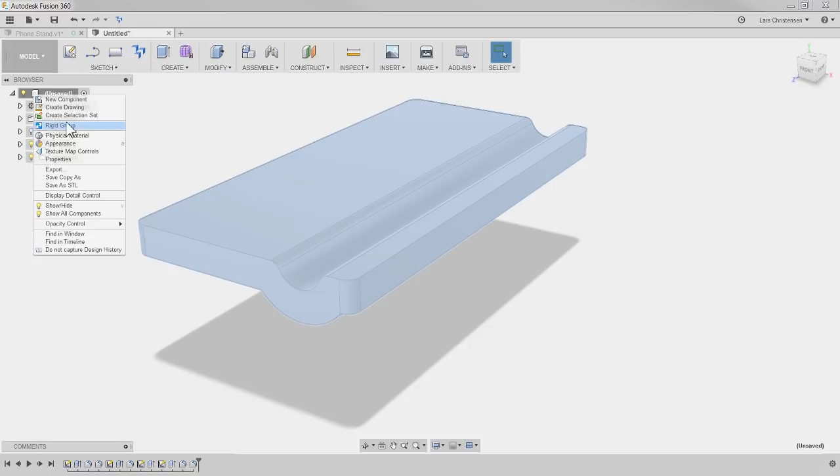The last thing I'm going to do here is change the color of it. In Fusion, the default color you're looking at isn't actually gray, it's steel. You can see this by right-clicking on the part and selecting physical material. There's a physical material assigned, used for things like simulation studies. You'll see it defaults to steel, and that's also what shows up if you right-click and select appearances.

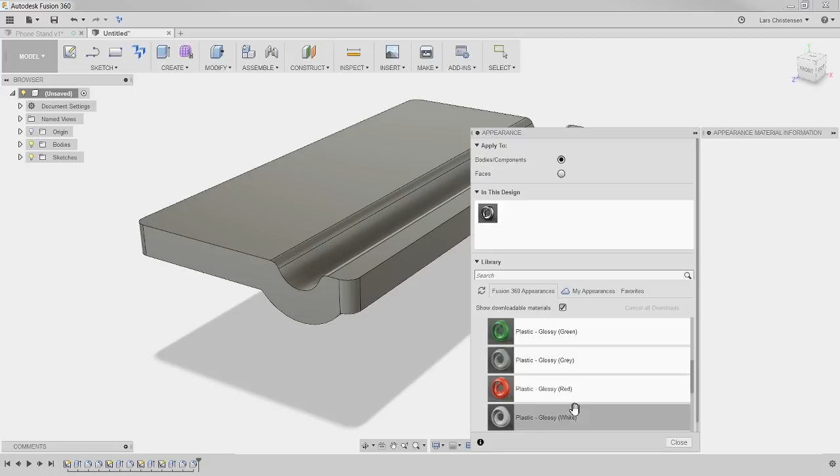So what I'd probably do is go with plastic instead. You can select different types in there. I did mine red, whatever you like. You can drag that out onto the part, or drag it up here and overwrite all of them. Then you end up with your iPhone or Samsung or whatever smartphone type of holder.

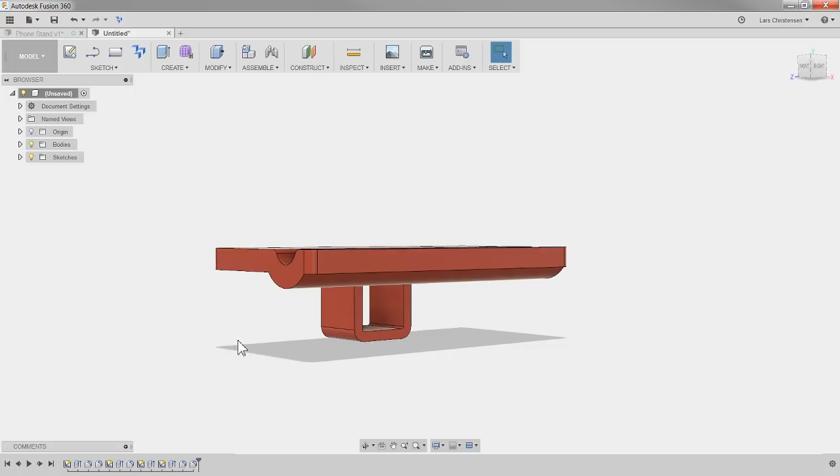Now you should probably save it, right? Hit save, choose whatever directory you'd like to save it in, and give it a name. We'll call it a phone holder, or maybe a phone stand. Let's call it a phone stand, and save it.

I'm not going to get into 3D printing, but this would be a nice part to print. Email me and I'll be happy to share this model with you. I think you should try modeling it yourself so you can fully customize it, but I'll share mine too.

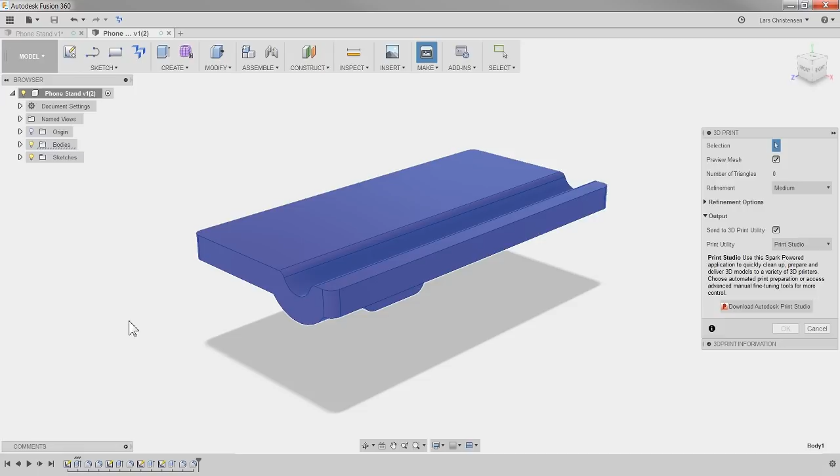You do have the Make button over here. You could go into 3D print it and select what you want. I normally like to use Meshmixer, that's my preferred printer utility, which will break it down for you if you do want to 3D print this little holder.

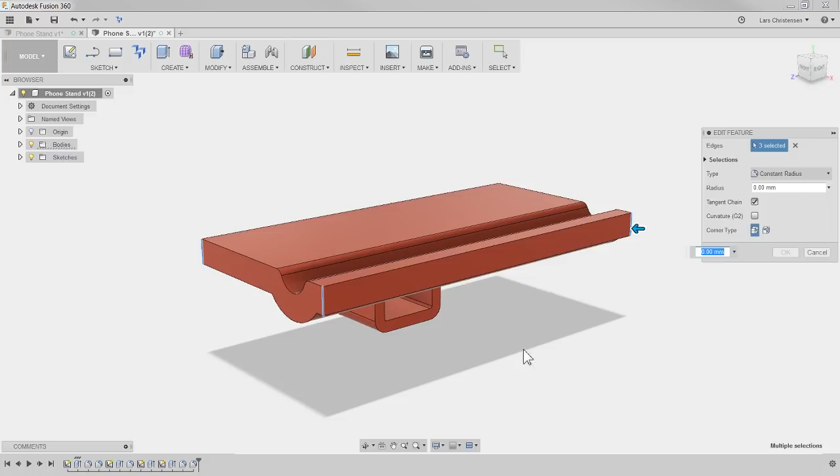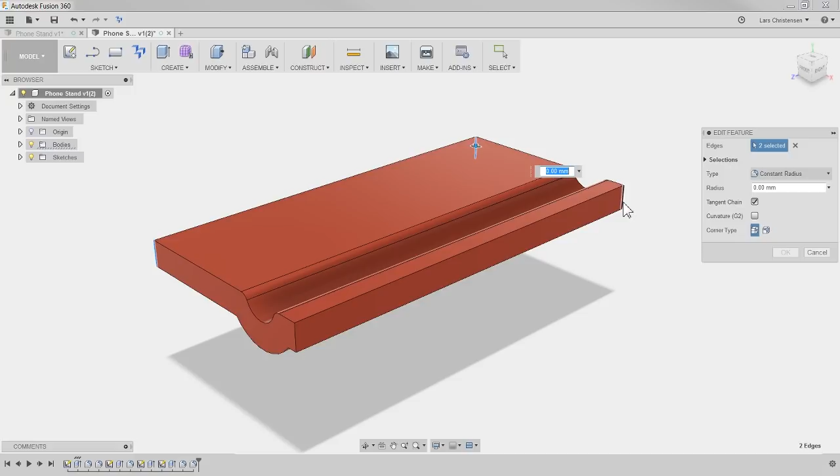Bob asked how I selected the back edges for the corner fillet. Let me go back to this one and edit it. For years, whenever I was doing fillets or chamfers, I would select the edges I could see, then spin around trying to find the back edge, until I realized Fusion is actually smart enough, if it's inside a fillet or chamfer, to let you select through. See how when I hover over where that edge would be, I can select it right there. It's like one of those small lazy man tricks, I prefer those. I think it was segment 6.